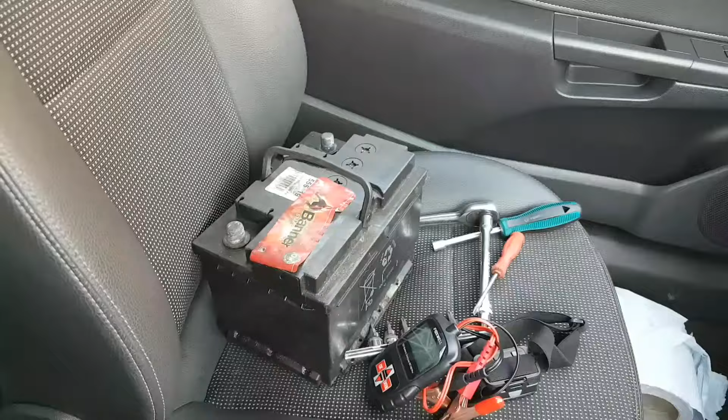Immediately I said I will not work on the car without a battery. So they brought me a battery, and I thought they would bring me a new battery, but they actually didn't. The car was open, they dropped me the battery the next day. That's where they left it. I haven't touched it yet.

There are some tools here because I was working yesterday on that Jaguar. Unfortunately, there is no video for that because it was raining all day yesterday and it was just not feasible to record. But it's all done, just waiting to be collected. That's why you have some tools here.

Anyway, I have my battery tester here to put on that battery and make sure the battery is good. If it is, we'll be replacing the battery on this car to start to work on it and try to figure out what's wrong with it. Obviously, I'm not the first one trying to have a look at this. This is how the car came. I haven't opened the bonnet yet, but let's go test the battery first.

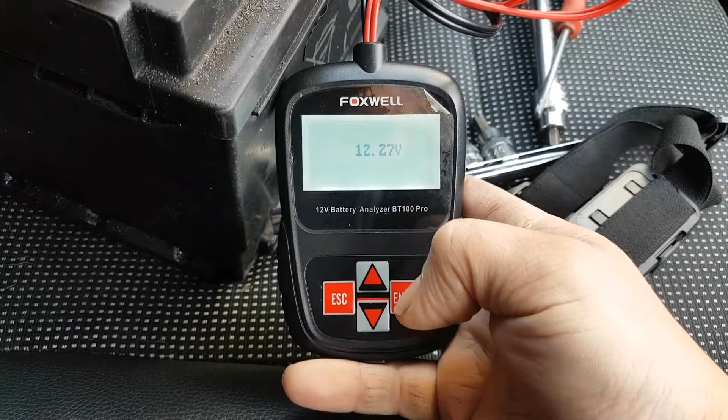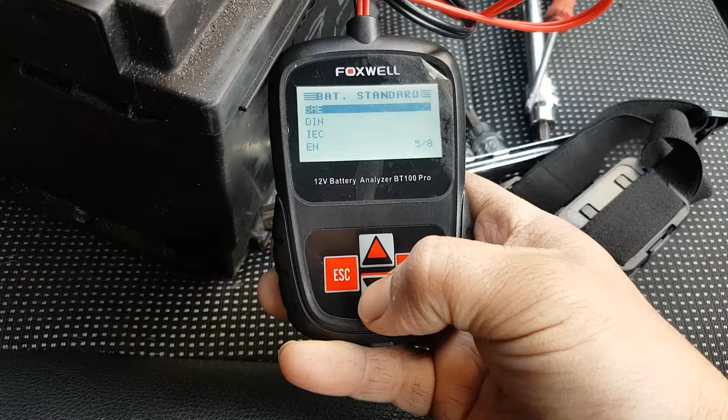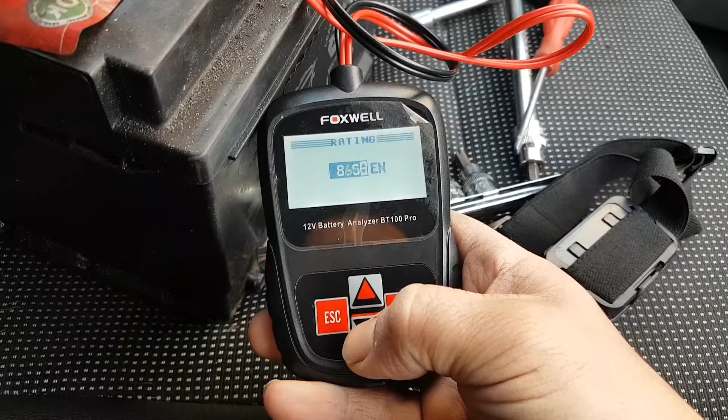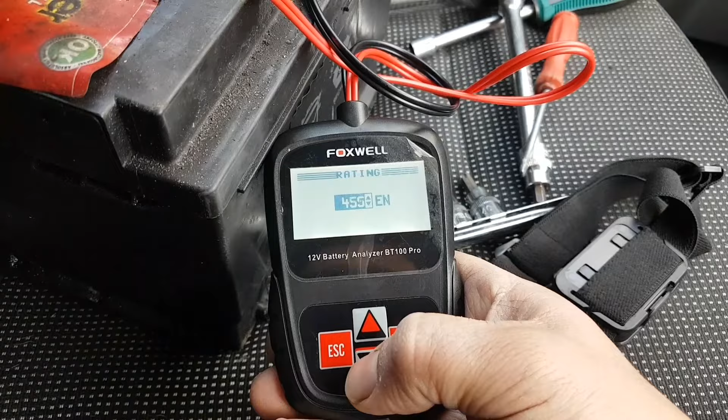Okay, it looks good. It's good when you see this kind of voltage. Let's do a battery test out of the vehicle. It's a regular battery, EN, 450 amps. 450, press enter. It's going to test. Good charge. Rated 450, measured 295.

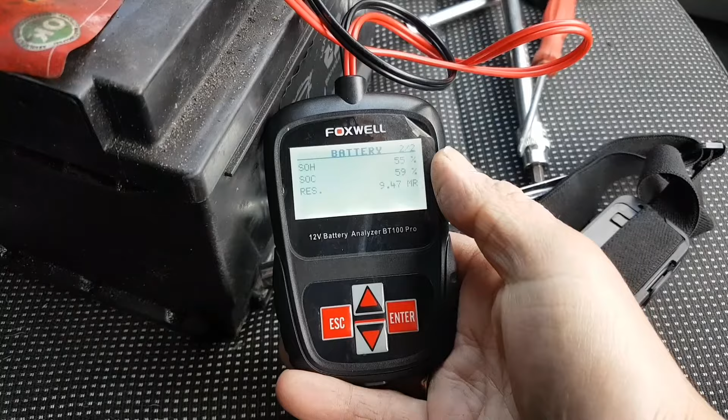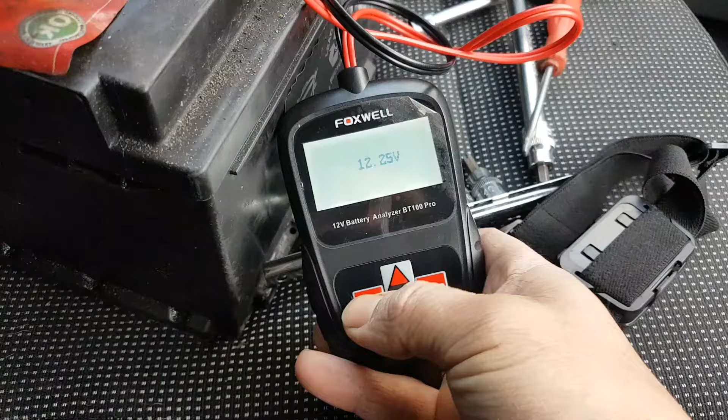The battery has been here for a few days now. 9.47 internal resistance. It's not too bad, I guess. Should be good for what we're going to be doing here. And the engine we are working on is a 1.6. So let's replace this battery, because right now, and I want to show you, I have nothing, absolutely nothing. So let's replace the battery.

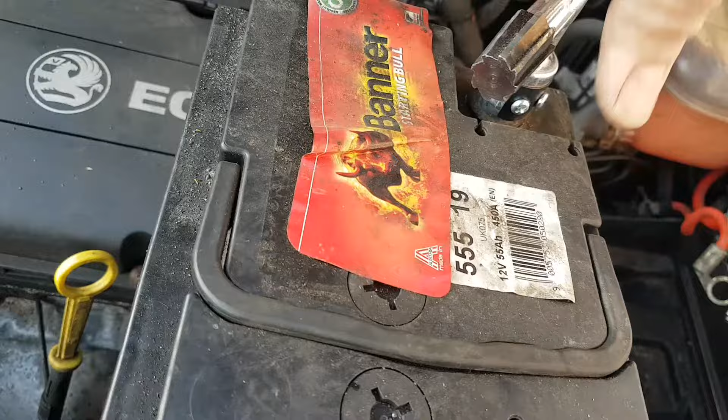Okay, the battery is connected, and we have some lights, well, at least one light. Let's turn the ignition on and see exactly what is happening. Ignition on. We have the engine light over there, we have the spanner light over there. Okay, let's crank. Okay, it cranks but doesn't start. Crank no start.

There's one thing already. Let me turn the ignition on again, because this is the importance of attention to detail. When I turn the key on, I cannot hear the fuel pump. Yeah, I can't hear the fuel pump. Don't know if that's going to be my problem, but definitely there's no fuel pump running. Don't know if there is one on this, most likely there is. So let's get the scanner and start from there.

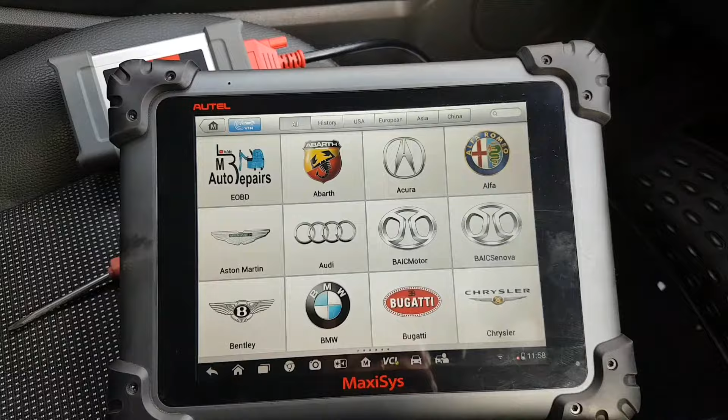By the way, this is the first video I'm doing without the RT pad. Today is Friday. I shipped the RT pad back to them on Monday. So from now on, we are back to work with the Maxisys.

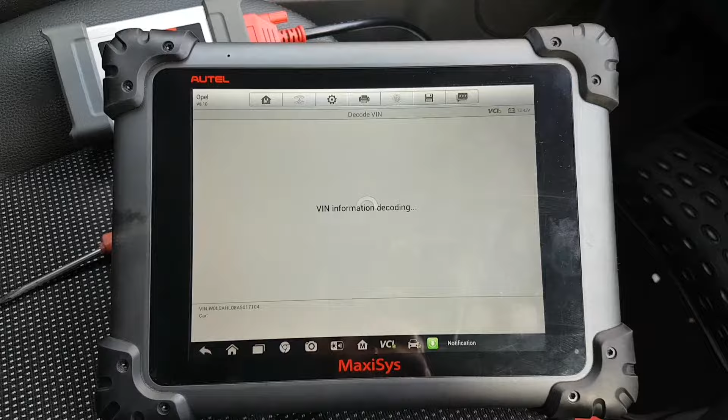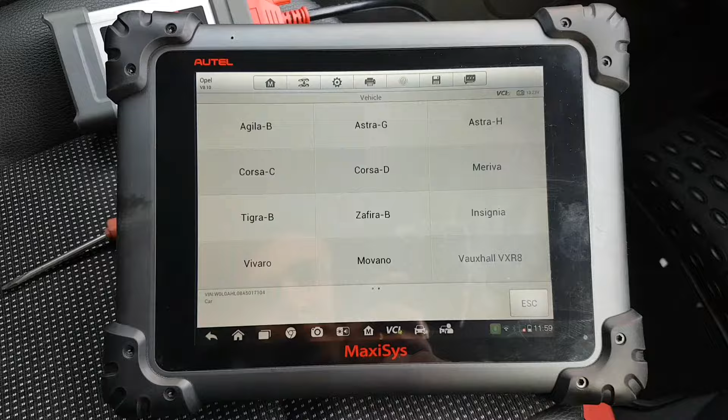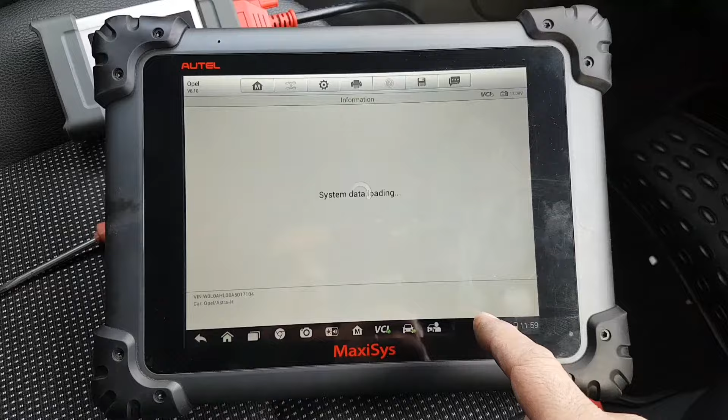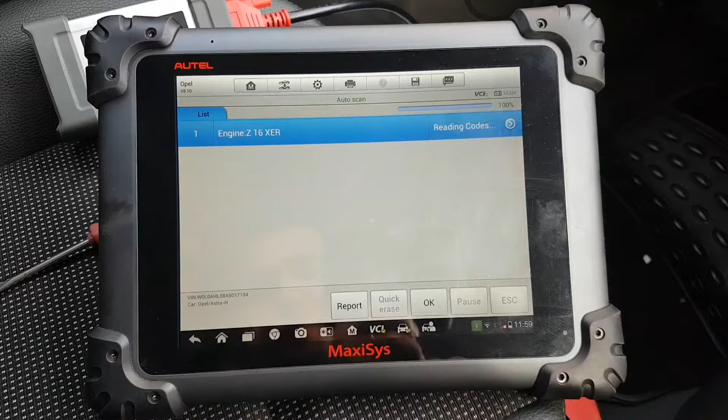The decoding failed. Okay, let's see. This is a 2009. It's an Astra H, maybe. Let's see if it detects the engine. Oh no, I've done it wrong. Oh no, it's alright. Let it load. Control module. Search the engine. There are 2 faults.

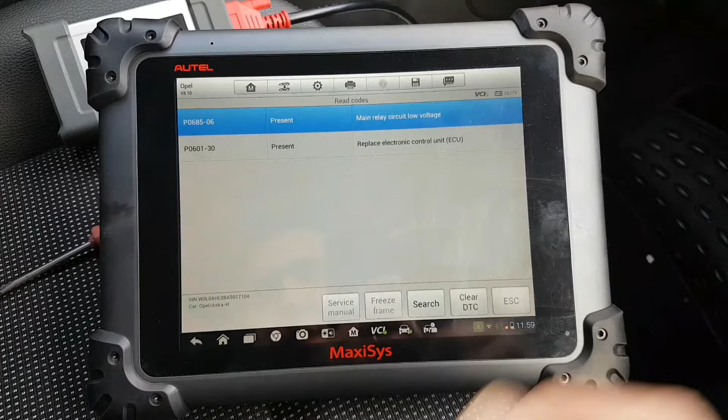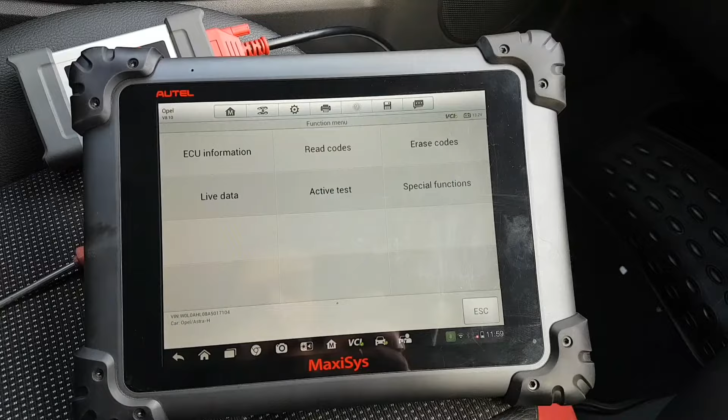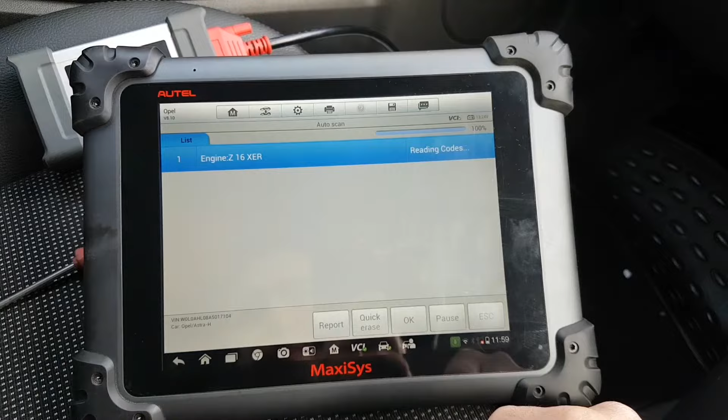And there we go. Look at that. Replace electronic control unit. Main relay, low voltage. So let's clear this, because obviously we know we had a low battery. Let's erase these codes. Okay, no codes. Key off. Crank.

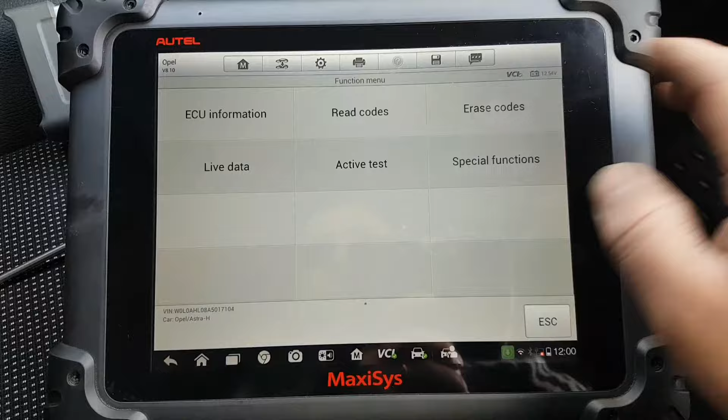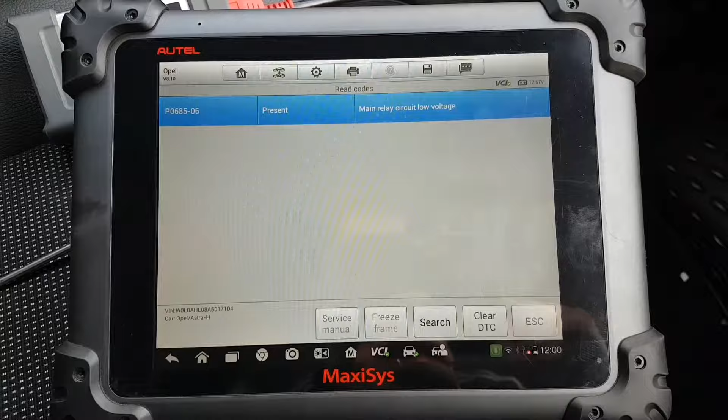Key off. Key on. Let's scan the car again. Read codes. Present: main relay circuit low voltage. I think it's quite self-explanatory. Let's check that. Okay, so this cover is broken, all the tabs. This is broken in there, so people don't know how to open stuff.

Okay, so main relay. Definitely someone has been here. Look at that. These relays, etc. Okay, let's start with the basics. Check all the fuses in here, check the relays, make sure they are working and they are good. I'm not going to bother you with that stuff. We're just going to test everything and go from there.

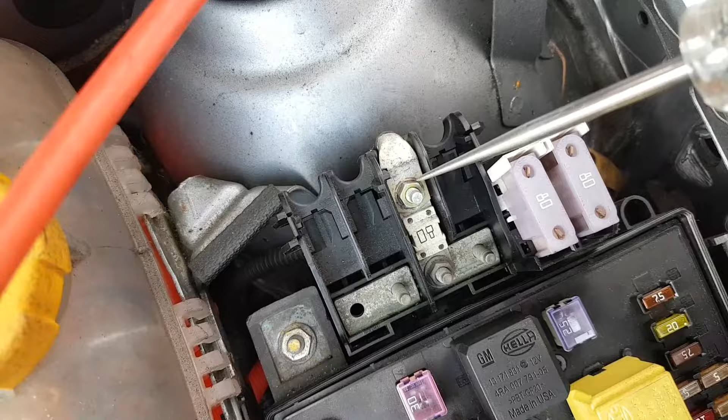Okay, the first thing we're going to do, because this cover here has been touched already, and when I took it off, you might not be able to see, but it looks like this has been touched here. Let me show you. You might be able to see in there, but it looks like we are good. So the fuse is good.

These two fuses are also good. You might not be able to see it, but they look good. Now the main relay. So we have terminal 15 relay, which I know is working because it's warm. And you have terminal 15. That, I believe, is the fuel pump, and that, if I'm not wrong, is the main relay. Now the main relay, when I take it off, is not doing anything.

Okay, so how we're going to quick test this: terminals 85 and 86, that's my coil. On this side I should have 12 volts or ground, and I have 12 volts in there. Let me show you. I have 12 volts on this side. Now the control wire for this is most likely going to be the ground on the other pin, which means when I apply ground to it, the relay should work if the relay is good. And off you go. Can you see that? Can you hear it?

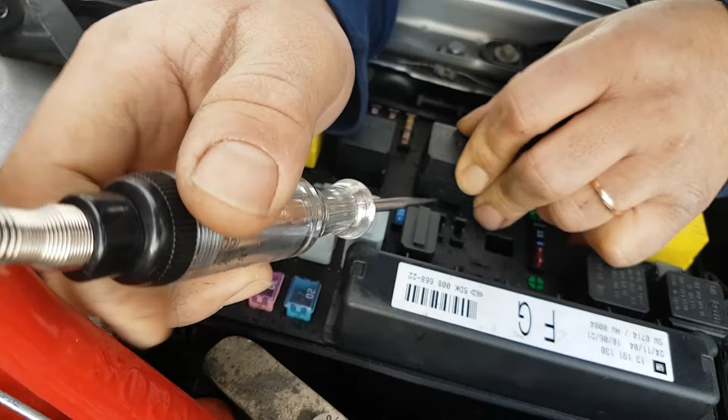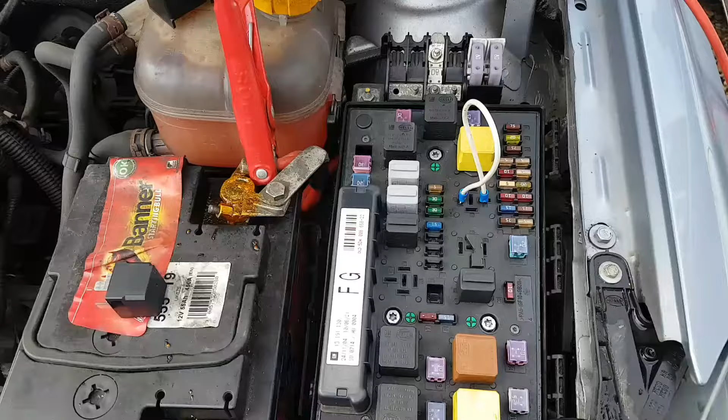Okay, so how we're going to do this for now, just for a quick test, is we're going to do this, and let's see what happens. So ignition off, because I had ignition on before. Okay, still nothing, and I know exactly why: because I haven't heard the fuel pump yet. Definitely no fuel pump. So let's do something else. Let's try this again. Oh, I can hear the fuel pump. Come on.

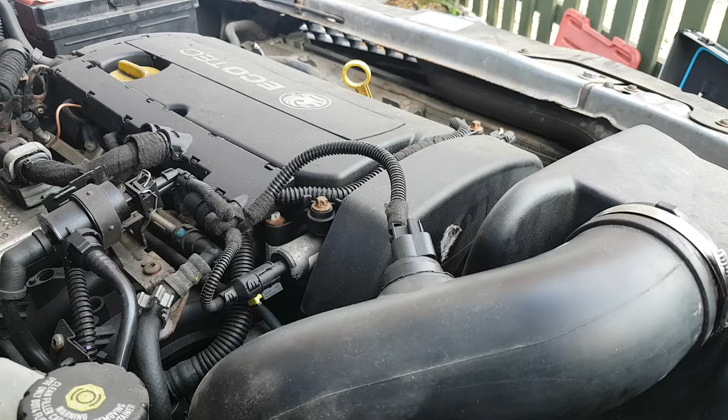Okay, we might have something else. Let me see. Hold on a second. Okay, so it's not starting yet. We definitely have multiple issues with this car right now. But first of all, I just want to understand why the engine is not starting. Obviously we have an electrical fault with the main relay, and we have a fuel delivery issue. At the moment I have the main relay bypassed, jumped, as you've seen, and the fuel pump runs as soon as I turn the ignition on. However, the car's still not starting.

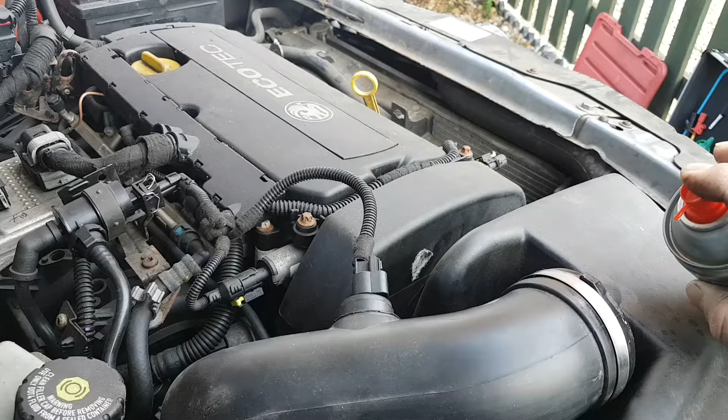But look what happens when I spray a little bit of easy start here. As you can see, I can keep the engine running by just spraying a little bit of easy start. There we go. So what does this prove to me? That I have a fuel delivery issue. Now, I still have an electrical fault somewhere, because my main relay is not coming on. I had to bypass all that.

Now I definitely can hear something on the tank. I think I'm going to have to take the pipe off at the front and see if I have fuel pressure in there. But definitely I can hear a sort of hum noise coming from the tank. If the pump is rotating or not, that's a different issue. But I think if it was not rotating, most likely it would blow a fuse somewhere. Anyway, so we have two issues. One is fuel delivery, the other one is the electrical fault.

So I'm most likely going to have to trace the electrical fault first, see why my main relay is not coming on. Once the main relay comes on, it should turn the fuel relay on. However, it's not doing it, so I had to bypass that as well. So it looks like there are a lot of issues with this car. And even with everything bypassed, the engine should definitely start now. As you've seen, it doesn't start because of a fuel delivery problem. Unless it's the ECU that is seeing this fault here.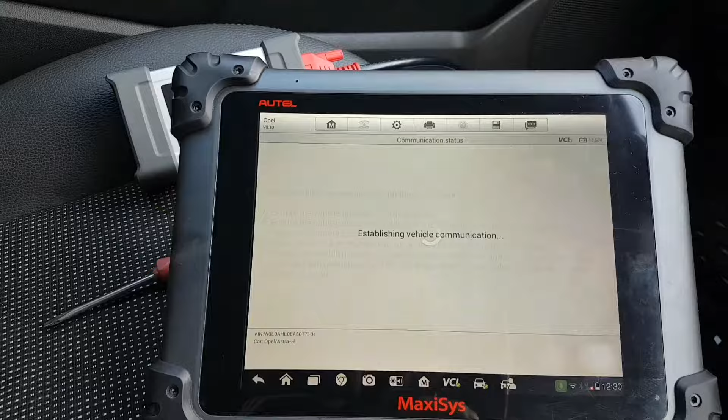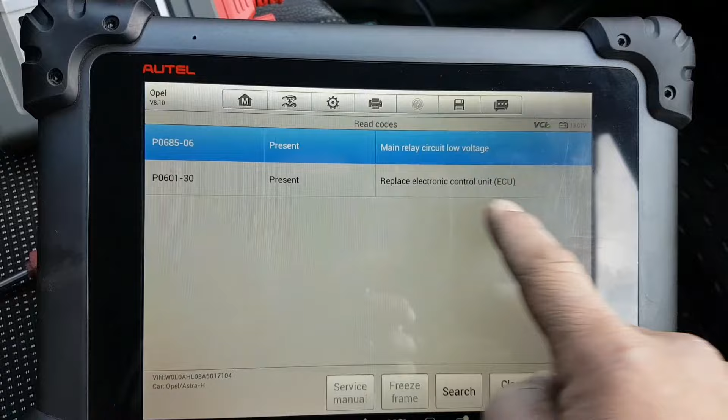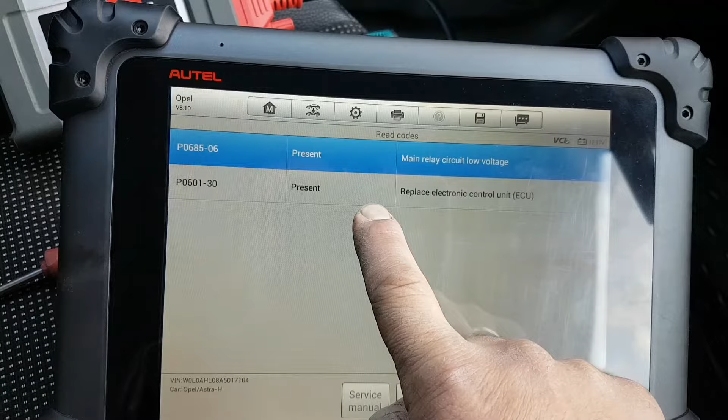Let me show you. I have ignition on, sorry about that. It keeps coming up with that one every time you crank for a little while, but this one is still coming on because the ECU is not seeing the relay circuit, and then it comes up with that fault. I don't know if it's because it's not seeing that, and in the meantime thinks it can't control the relay. Honestly, I don't know.

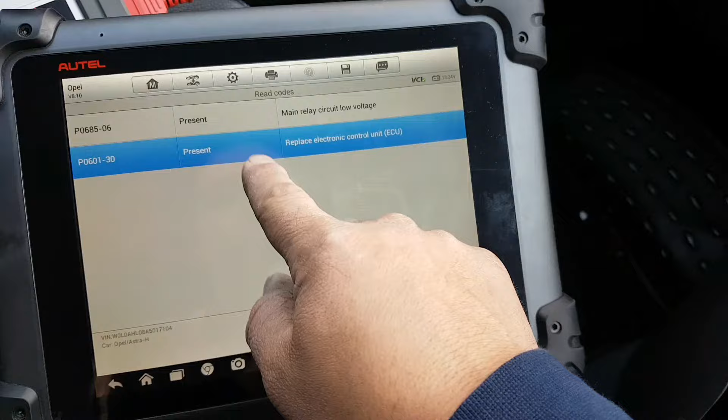But right now, with everything bypassed the way it is, it should start. As you've seen, the car runs with easy start. So I'm not really sure if there is really an issue with the ECU at the moment. We might need to investigate that a little further. But let's start with the electrical fault. Let's check some diagrams, see where that control wire comes from, and go from there.

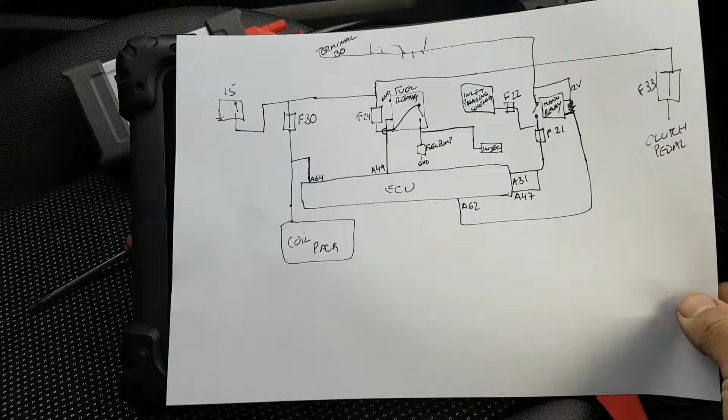Got hold of some diagrams. It would be easier to show you the actual diagrams, but I just drew here quickly the bits we need. So let me see if I can follow this with you. So that's my engine ECU. This is purely for the main relay, fuel relay, and terminal 15, which is already working fine as I've shown you.

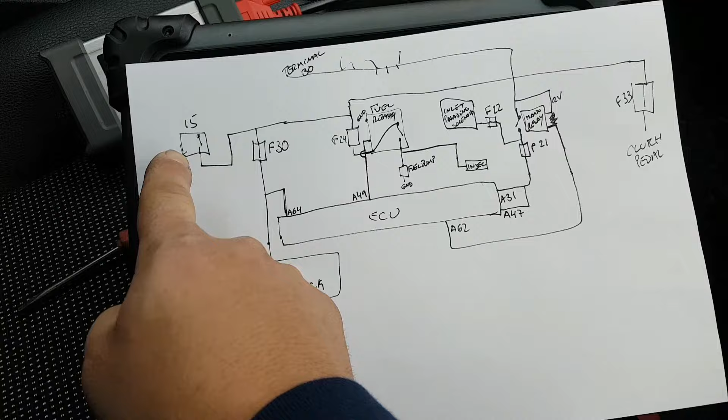So terminal 15 is absolutely fine. Everything is working there. Terminal 15, when the relay comes on, it sends the voltage to fuse 30, which feeds the coil pack and feeds voltage to the engine ECU pin A64. Then that same voltage carries on, feeds fuse 24, and feeds fuse 33, which is the clutch pedal.

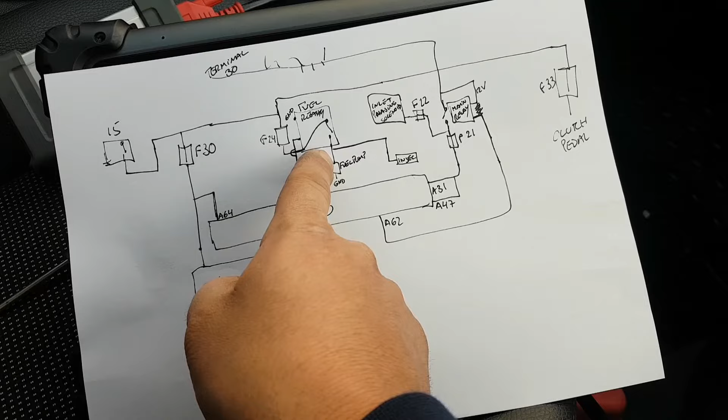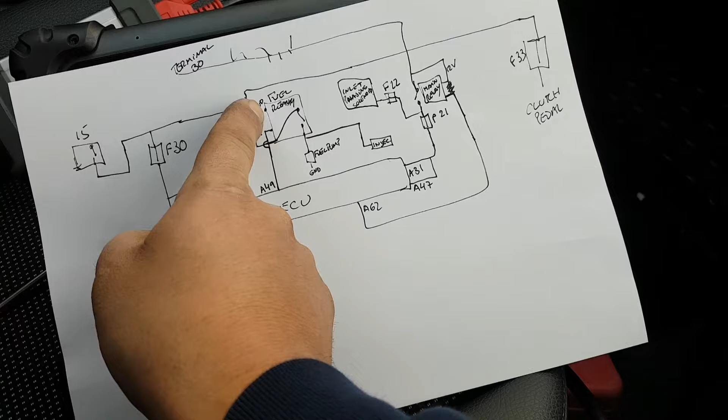From fuse 24, it goes to the load side of the fuel pump relay, which obviously then feeds the fuel pump when the relay closes. And when this relay closes, it feeds the fuel pump and feeds the injectors. The injectors are then grounded, obviously, to open. The control side of the fuel pump relay, however, is here, so it is grounded all the time on one side, and this relay is actually applied voltage by the ECU itself, pin A49.

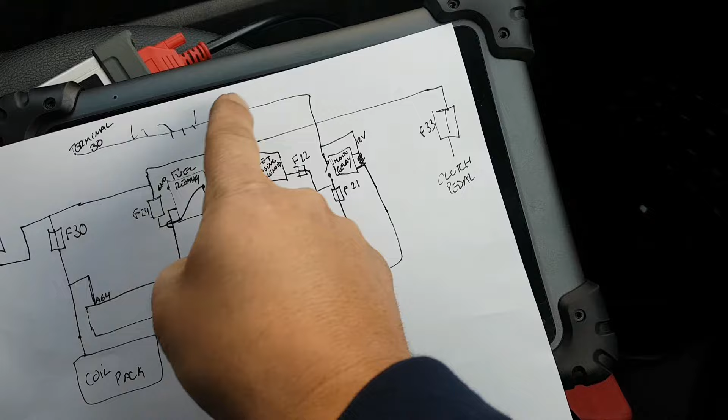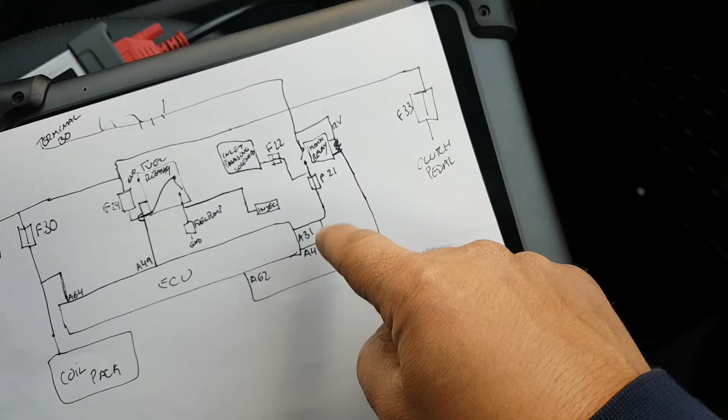The main relay is here, so the main relay is kind of a separate circuit. It comes from terminal 30 all the way. It feeds all the stuff around here, doesn't really matter. Then it feeds all the way down to the load side, which when the relay closes, feeds fuse 21 and fuse 12. Fuse 12 goes for the inlet camshaft dephasing solenoid, and fuse 21 comes all the way down and splices into wires to feed pin A31 and A47.

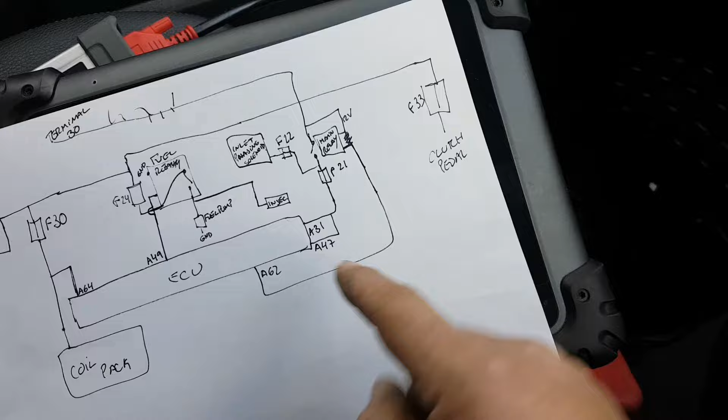So the main relay, from terminal 30, also feeds the coil side with 12 volts, and then the ECU grounds the relay on pin A62. So this is now grounding, so we need to check from pin A62 all the way to my relay. If the wire is good, guess what? We might have an ECU fault. So let's check it.

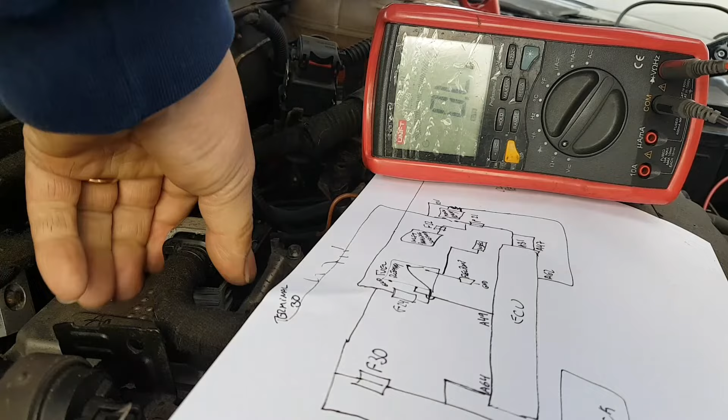Okay, and I can't open this because they broke. Oh crap. Seriously. Oh, I hate this. Someone broke these levers to open the... Actually, see. Oh, hold on a sec. And I even took the wrong plug because it was not this one, but while it's out, the other one is not broken, which is not too bad. Okay, so the pins look good to me, cleaned, etc.

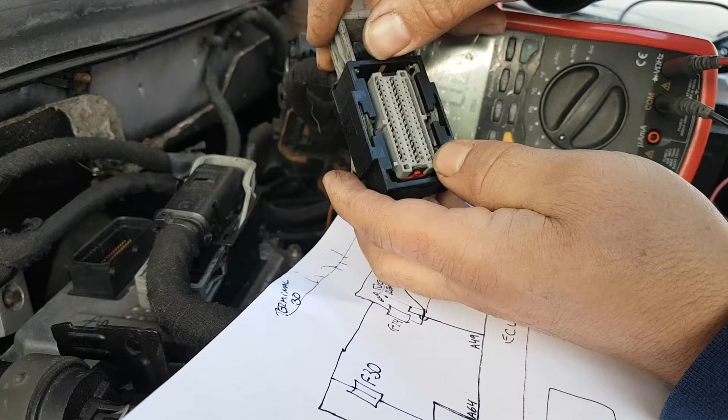So let's go on this plug and find my pin. Ooh, what's this? I can see corrosion here. There's some corrosion on the pins. Has this ECU been replaced? I can definitely see some corrosion there. I don't know if you can see it on the camera. Some corrosion, there's some pins here that don't look very good.

Nevertheless, let's look for the pin. So my main relay is pin A62. Oh, the heck, there's no numbers on this side of the plug, is there? Oh dear, so pin 1 is there. 49, 64. So pin 64 looks like this one here. 64, 63, 62, and it has corrosion on it. Let's check.

Maybe this side. There's nothing on it. Nope, there's definitely nothing on this pin. Just double check that I'm at the right pin. 64 will be 63, 62. Yeah, definitely it's this pin, and it has to be this plug because it's the only plug that goes into that side. This plug is for the engine side, so it's going to have to be this one.

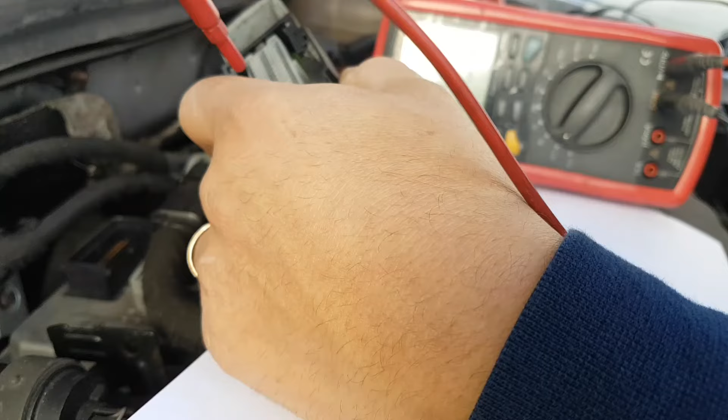Let's check another one, just out of curiosity. Let's go, for example, for the fuel pump relay, A49. A49 is going to be right at the other end. It's that one there. There we go, look at that, A49 is good. Bingo. As you can see, I have continuity on this one, from pin A49 to my control wire of the fuel pump relay, but I have nothing on the main relay.

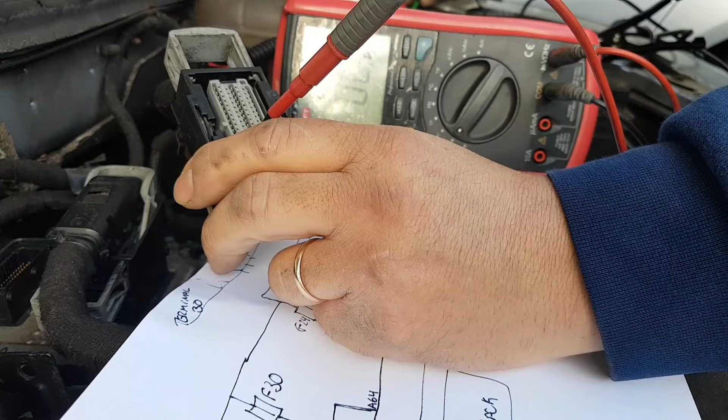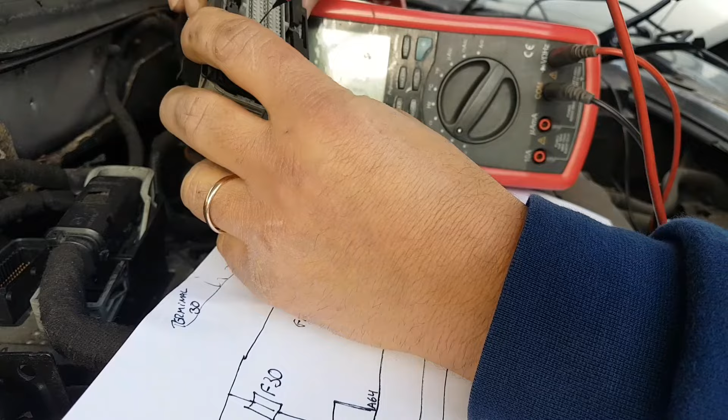So let's go back to A62, that one there, back to 86. It's 86, I think it's going to be on this side. I'm sure it is, because I had 12 volts on the other side, so I'm pretty sure it's going to be here. I have nothing here at all. Okay, so do we have a wire problem? Oh dear. I can see corrosion here, which is not very good to start with.

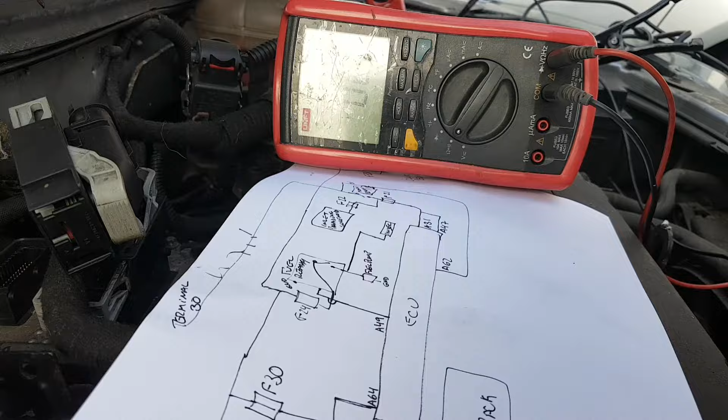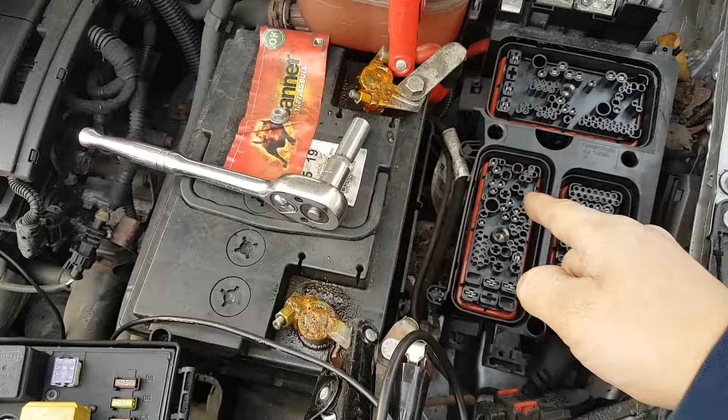Okay, let me do this a little bit off camera, because otherwise you'll just get bored. Okay, and just to make sure, we're going to be doing something different here now. I'm going to check this pin here, which is the pin that should go into the ECU plug. I'm going to see which one it is over here, and we're going to trace it down here, see if it's okay or not, because it could be a problem inside this. It could be that we have the signal up to here, and then in here something might be wrong.

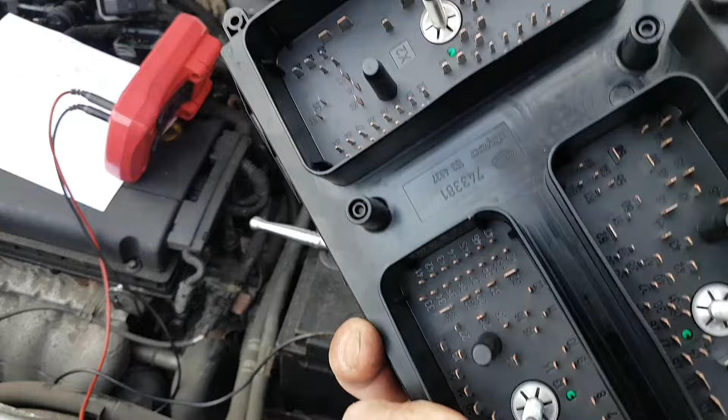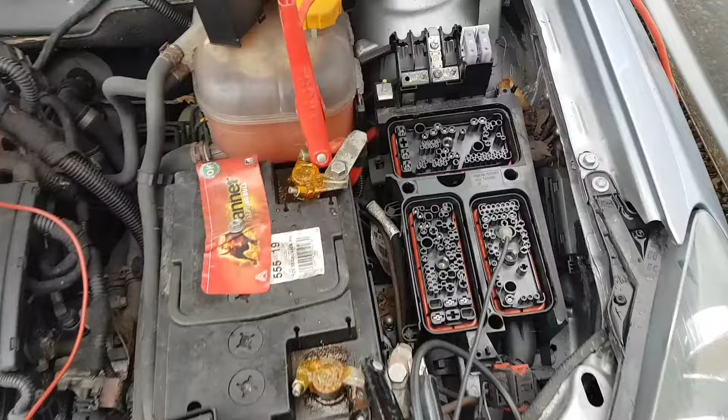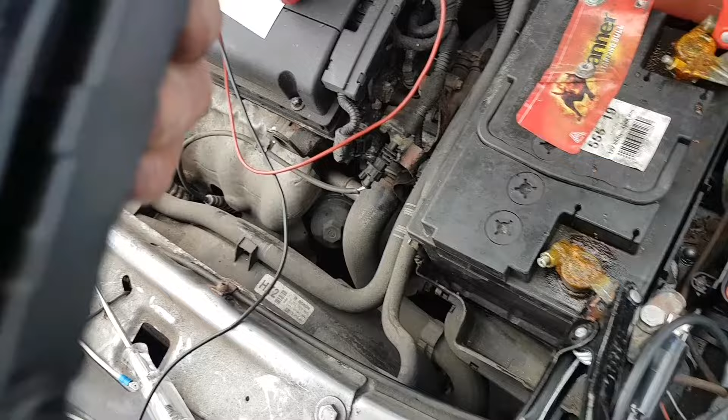Looking on this side, I can't see any signs of corrosion, etc., but you never know. I don't even know if this has been replaced or touched, so let's figure that out. Okay, once I've traced my pin, this one here on this little tree is pin number 16 from this side, which is right there. So as you can see, there's three in there, that's pin 16, so that's my pin that goes in there.

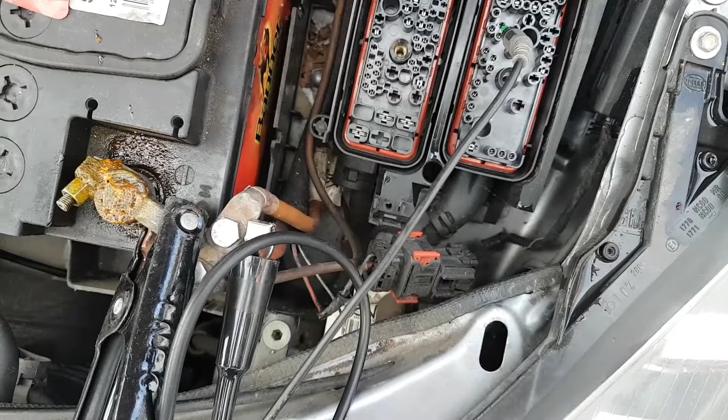And as you can see, I still have no continuity. So we have an open line somewhere from here all the way to there. So we're gonna have to strip this loom and find out where the problem is. Okay, I found my issue.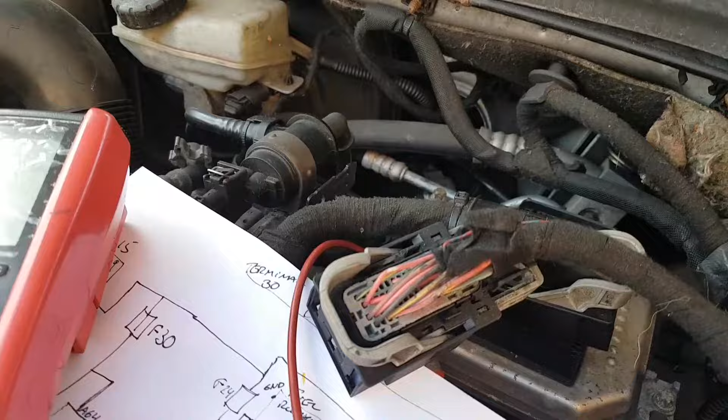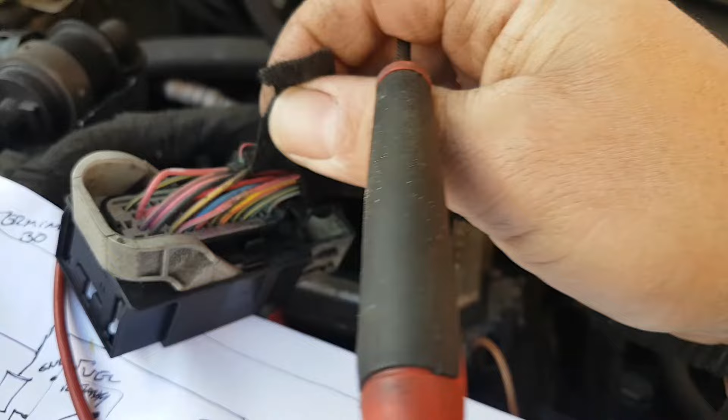First of all, is this wire here factory fitted wire, because it comes into my pin 62. Look, see there, it's all corroded. This wire here has been touching this wire underneath. Can you see there? So let's strip this down and see exactly what's been done here.

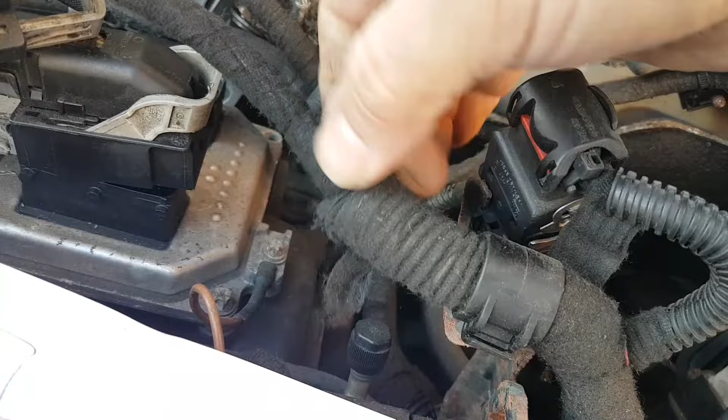See, this wire has been put over the, oh look at that, has been put over the original loom. So don't know if this was a design flaw at the start and they had to add these later on. It's a really thin wire that's been a little bit crucified over time. Let's see what happens when I connect this properly. Okay, let's see where this wire actually goes.

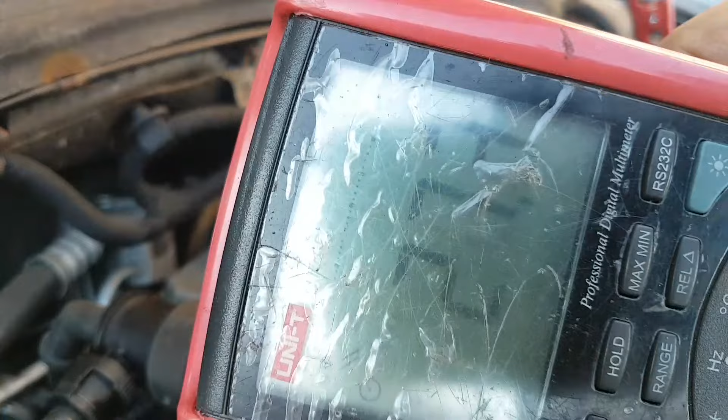And look at that, it's a little bit rusty, but there we go. You see that? Obviously it's a little bit rusty, the contact is not very good, but still connected in there on my correct pin. So don't know where the other wire goes. The wire has been soldered in there, right there on that one. Might be a design flaw on Vauxhall and they had an extra wire for that. But anyway, let's connect this properly.

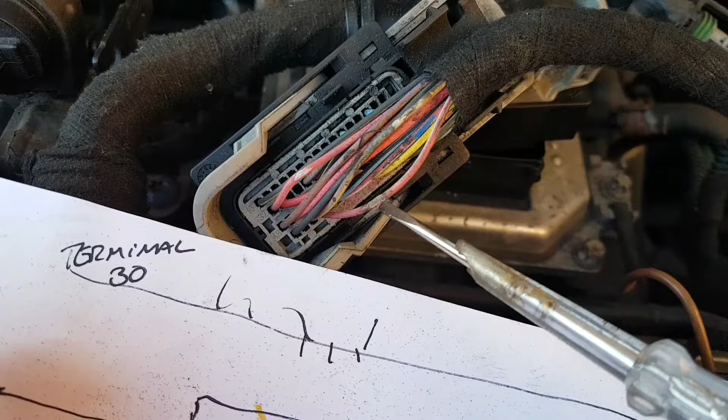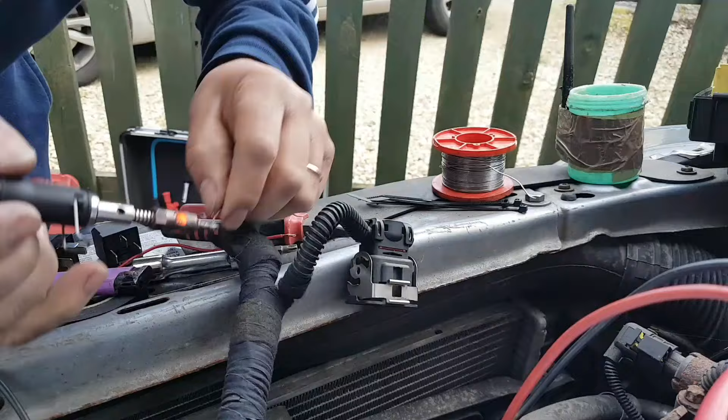I'm gonna repair this wire underneath here because it doesn't look very good. It looks like it's been done already. So we're gonna repair this one as well, solder that one correctly in there, and see what happens after. There we go. So we got it soldered in there, up to there, all good.

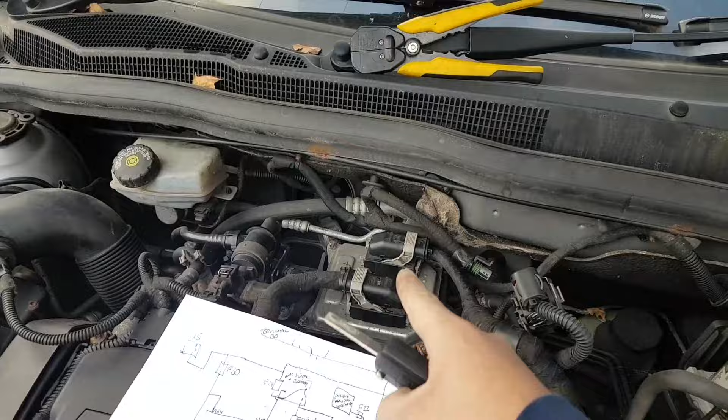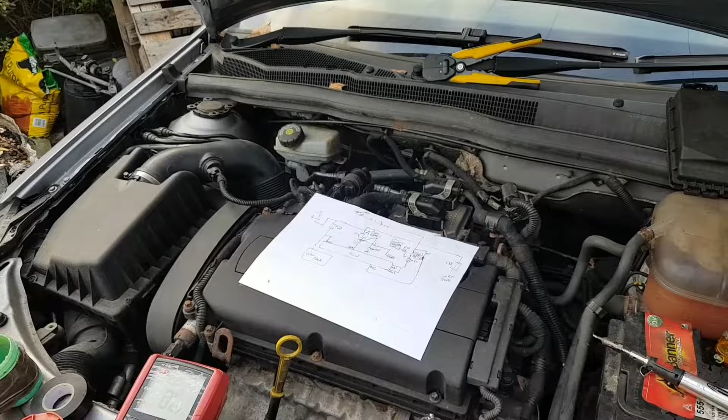I'm just gonna wrap everything, put everything back on. I put the wire here as well inside the trunking where this clip was. Isolate a little bit better here. Gonna do the same here now. Okay, so everything's connected now. I've wrapped all this again so there's no wires exposed down there. This is back in place. I think everything's connected. The air hose is connected again. Yeah, I think I'm ready to try.

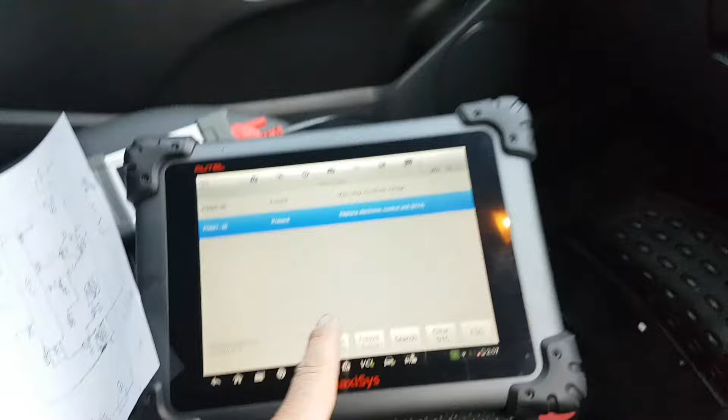So, let's see what happens now when I turn the ignition on. Oh, look at that. Straight away. Lovely. Absolutely lovely. Now, just one quick thing, hold on. Okay, sorry about that. I thought I left something on the bonnet that would fall off on the top of the engine, but I didn't. So let's clear these codes now.

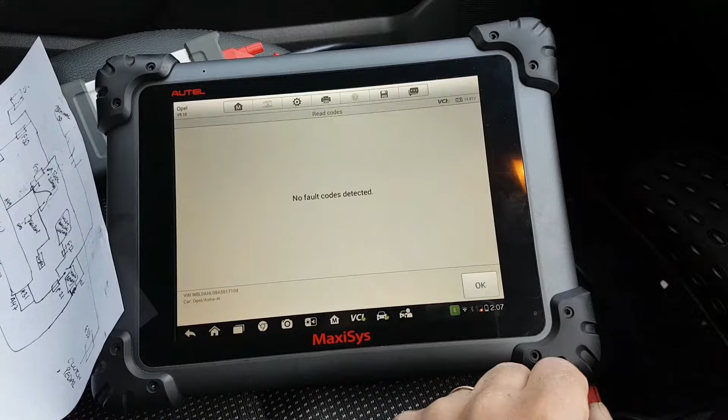We should have no codes, I guess. There we go. No codes. Let's turn it off. Oh, that's because I'm scanning the ECU, I think. There we go. Yeah, so that's out. So that should come out now. There we go. Let's start it again. Lovely. Problem fixed. So, in the end, all it was was that wire.

Now, it looks to me like that wire that actually goes inside the loom might be for a different engine version, for a different UHC I think it is, under the hood module, whatever that is. So that module in there, that fuse box, might be for a different model. And I guess for this car, all they did was just put that external wire.

So that wire, I don't really know where it goes. It should go into that pin in there, unless in a different module, in a different fuse box, that relays in a different place. I could go and dig it, but there's really no point. Car is running, car is fixed. It was only that solder at the top. That wire corroded, broke down, and that's what it was, guys. So I will start it once more just so you can see. There we go. And that's it.

So what else to say? Hope there's some information here you guys are going to find useful, hopefully the way I approached it. You might ask why I went straight into that multi-plug on the ECU. For no other reason really than the fact that I've seen corrosion on the plug itself on the inside, as it goes in the ECU, I've showed you, a little bit of points of corrosion. So I thought, let me take the cover off on the other side to see how the wires were in there, and straight away I found that. So maybe I was lucky, but we were on the right track anyway. And yeah, we got there in the end.